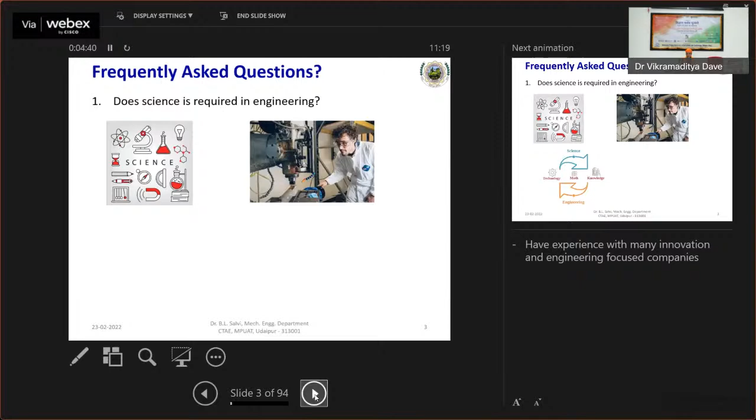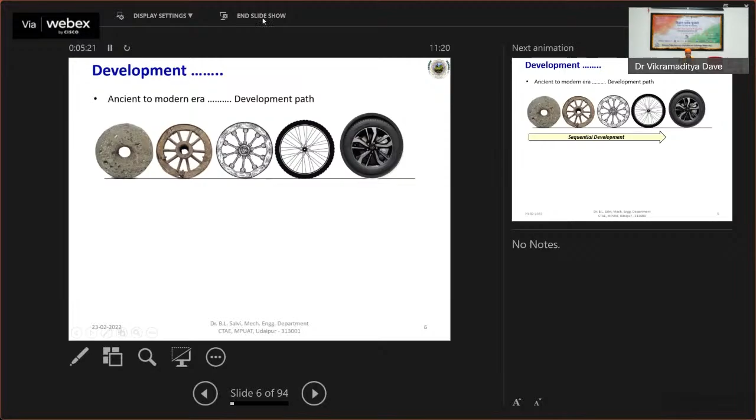Sixth slide. Here we can see the advancements.

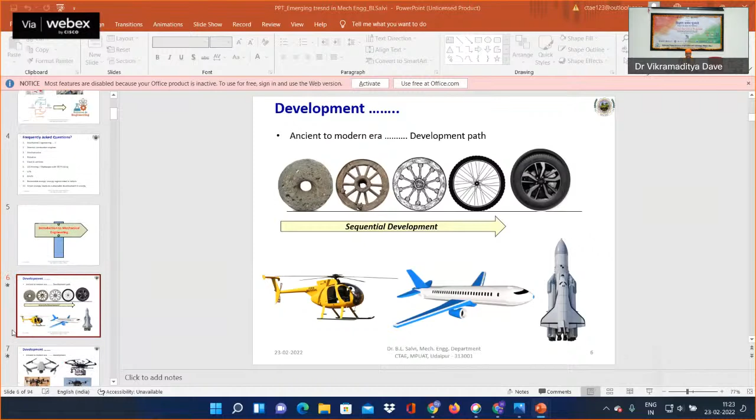When we look at the transportation sector, we can find the role of the locomotive train, where steam power was mainly utilized for transportation, and now we are moving toward the bullet train.

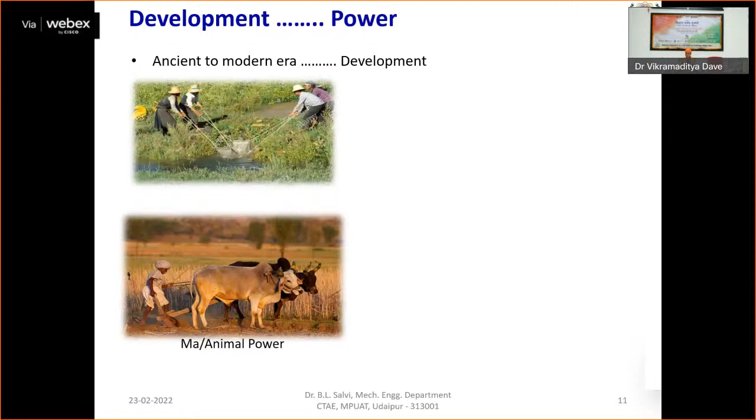Here again we can see the role of science and engineering, where initially manual power or animal power was being utilized for certain agricultural activities, and now we are using machine power, where mechanical engineering is playing a role.

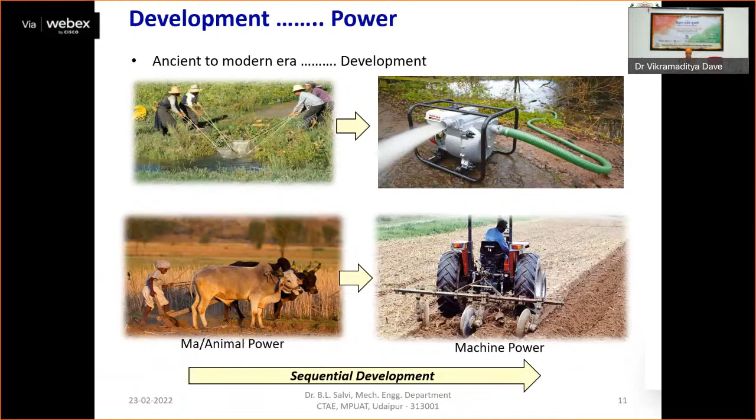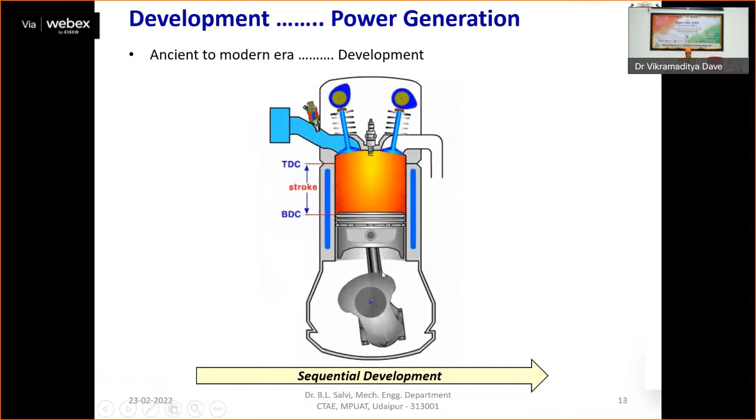Here we can see the steam engines moving toward diesel generator sets for power generation, and now you can see the internal view of the working of the internal combustion engine, where a lot of science and engineering is involved, ultimately leading to the development of mechanical power and then electrical power.

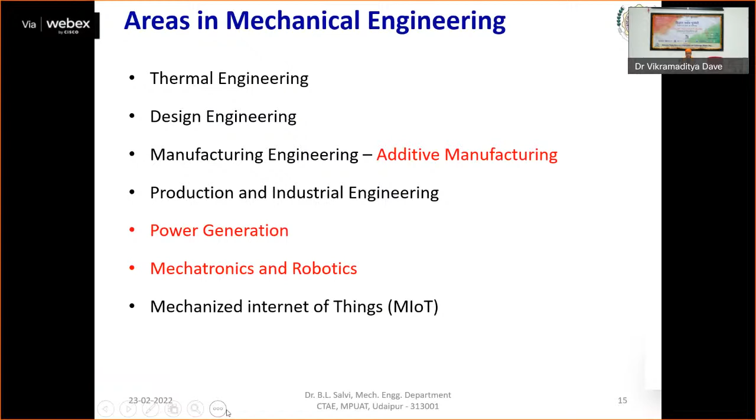So looking at all these things, now let us move toward the advancement part of trends in mechanical engineering, where I will be taking up additive manufacturing and 3D printing.

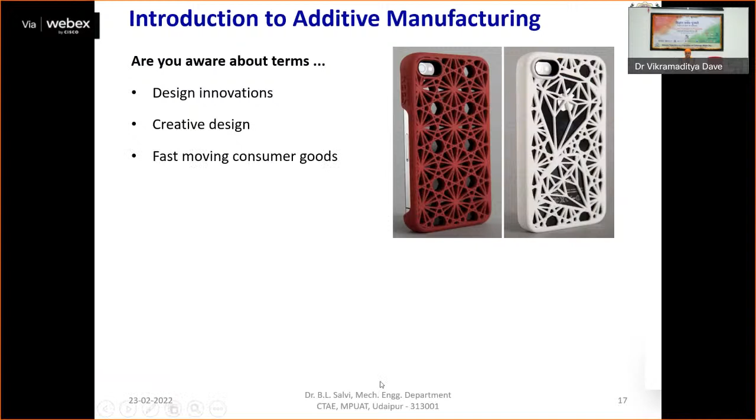So here, let us begin with 3D printing. Let us come to know, are you aware of some terms like design innovation or creative design, fast moving consumer goods, product development? All these things require rapid development of the product.

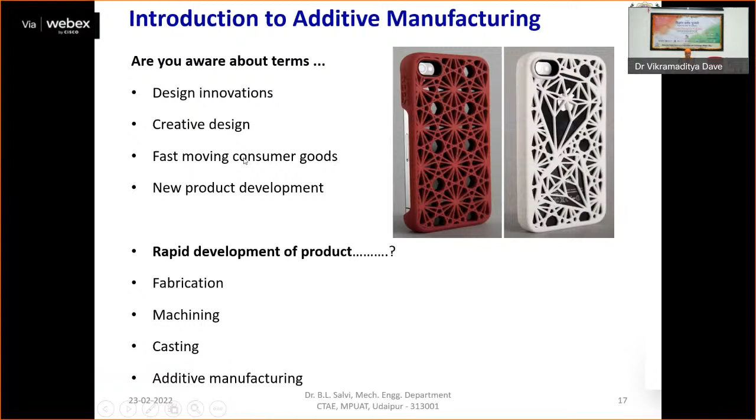This rapid development can be done through fabrication, or through some machining process, or through casting process. In all these things, the advancement now we are having is additive manufacturing, and that can be done with the help of some kind of 3D printers.

So here we use this production technology for material addition or deposition, and we deposit the material layer by layer and get the desired geometry. Materials can be used in the form of wire, or deposition through fusion of powder and solidification.

It bridges the gap from ideas and images on a page or screen, allowing for creation of those ideas and images in a physical object, that is, we say, 3 dimensional. So it allows for fast development.

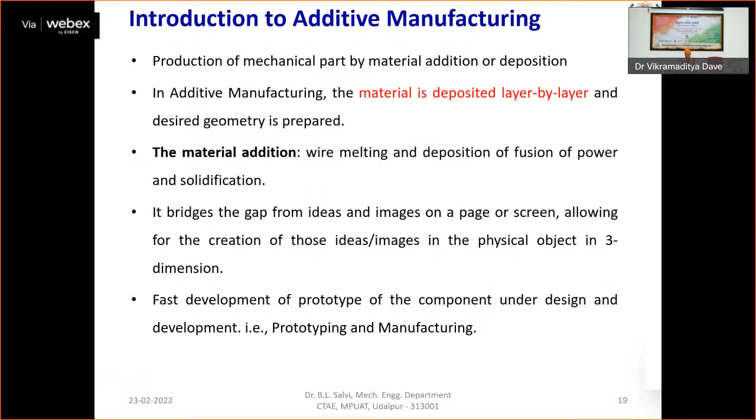So this additive manufacturing is basically used to build up a component by layer by layer deposition of material.

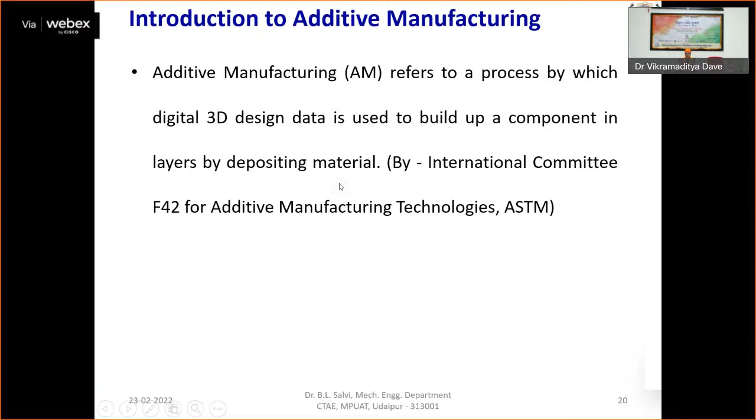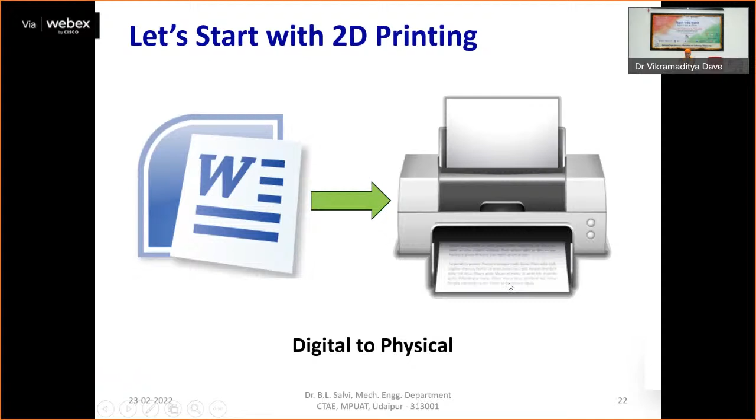So let us come to this 3D printing. The basic concept of 3D printing is to have a 2D printed component, which is like paper we use in 2D printers. But when we talk about the 3D printer, it requires the 3D component in a CAD software.

That 3D model of the component is printed using this 3D printer, and it comes out in the form of an object. So that object prepared can be utilized for education purposes, prototyping, manufacturing purposes, agriculture implements, or medical applications.

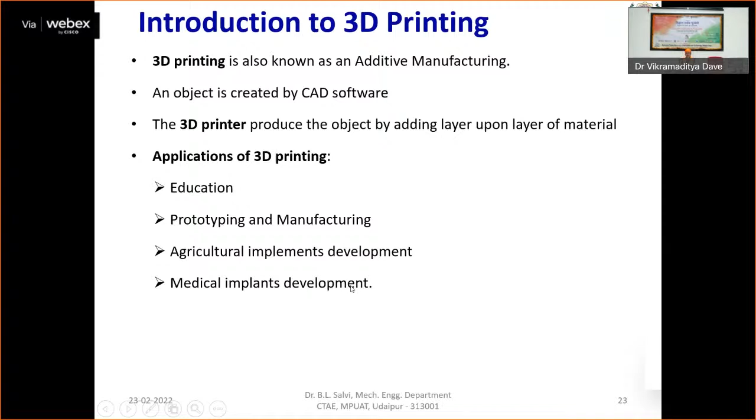You can see here the 3D technology, where the CAD model is developed initially, and this is produced in the form of a real object.

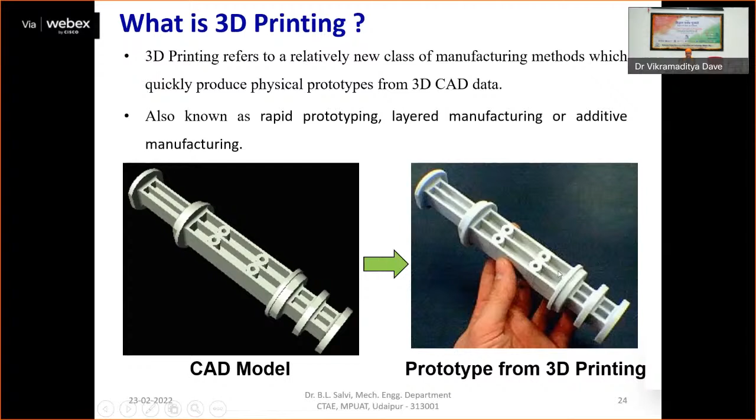How does it work? So basically we have a CAD model of the component which is to be produced. Then this CAD model is sliced into a number of layers.

These layers, when sequentially deposited, give us the component form, and ultimately we can have the physical prototype of the component. So starting from the soft model or CAD model, now we have reached the actual component development, and that is the basis of the 3D printing mechanism.

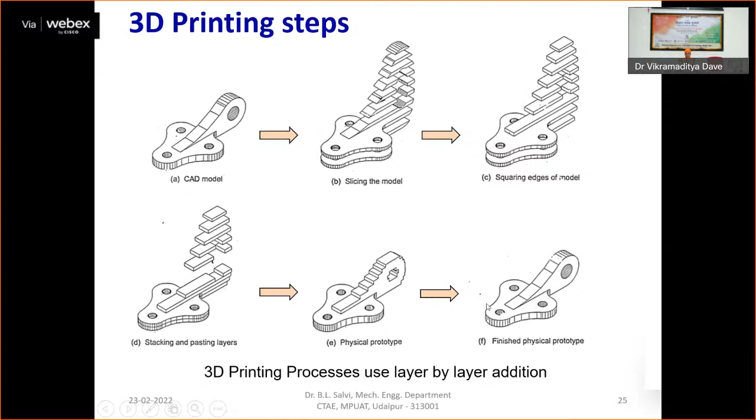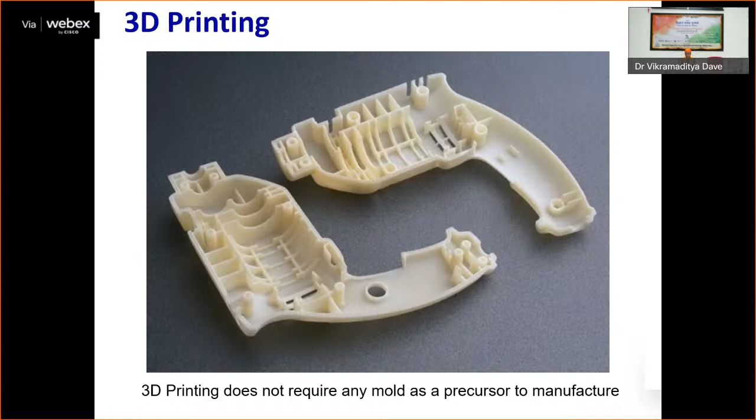So this physical prototype is finished and we are getting the final product. You can develop complex shape components without having any complicated or complex tooling.

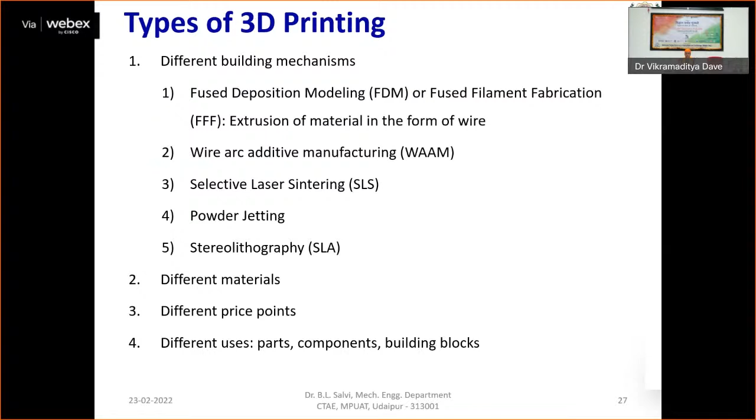There are various methods of 3D printing like fused deposition modeling, wire arc additive manufacturing, selective laser sintering, powder jetting, and stereolithography. Apart from this, there are other methods based on the material used or different price points, or different user needs like parts, components, or building blocks. Based on that we have different technologies.

So how does FDM, fused deposition modeling, work? We use a wire, which is basically a plastic material. It is heated, and after heating it is deposited layer by layer in a proper geometrical shape, controlled by the 3D printer, where mechatronics applications play a vital role. There is a blending of computer science, mechanical engineering, electronics, electricals, and various drives, all together making a machine which brings the component into physical form, and we call it 3D printing.

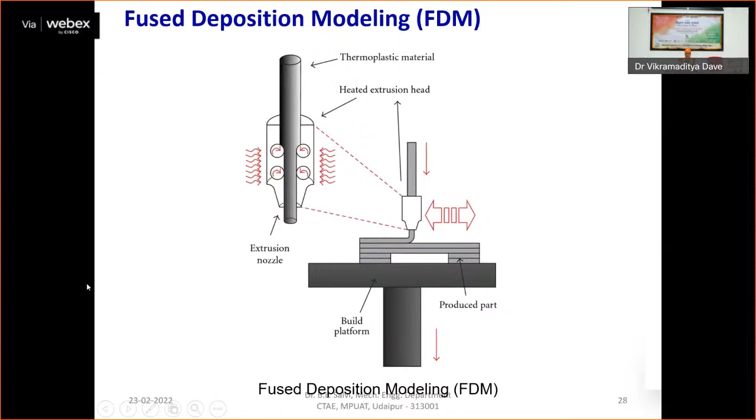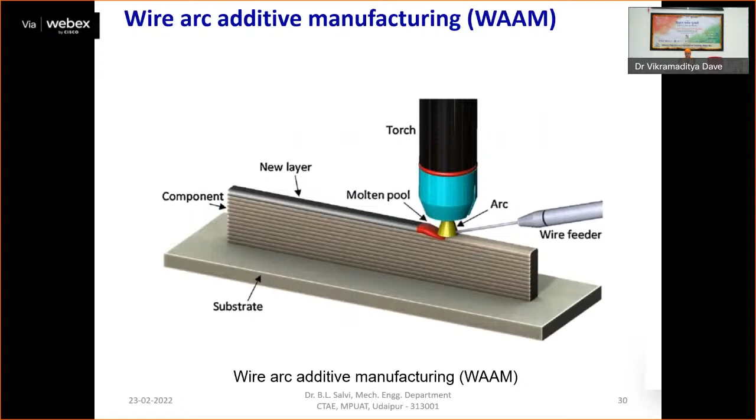Further, we can use a multi-jetting system. We can use two wires for multicolor or multi-material development of the component. There is another kind called wire arc additive manufacturing, where an arc is developed to fuse the wire and it is deposited layer by layer.

To do all these things, we require dedicated materials. These materials can be metallic, like plain carbon steel, tool steel, or stainless steel. You can use polymers like ABS, nylon, or PP material, epoxies, and many more. Other materials also exist, like refractories such as sand or ceramic waste, elastomers, conductors, and then we have good applications of biocompatible materials.

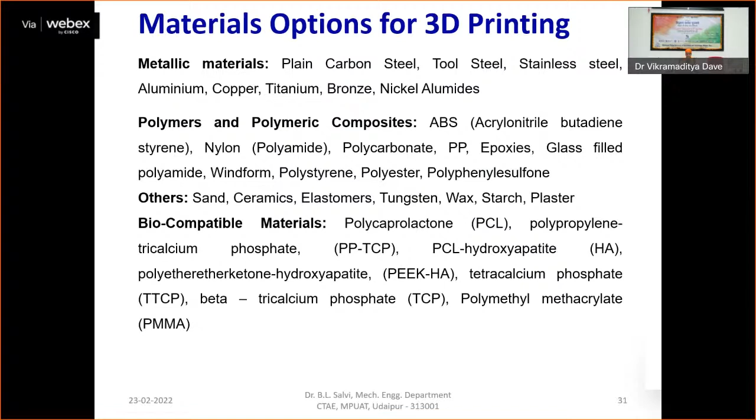We can replace some damaged hip joints or body parts through proper development of components with the help of 3D printing.

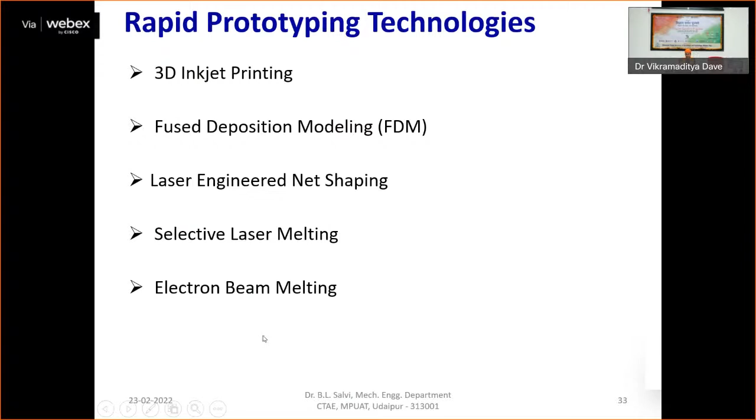This 3D printing is basically a technology which helps in rapid prototyping, and here we use concepts like 3D inkjet printing, fused deposition modeling, laser engineered net shaping, selective laser melting, or electron beam melting. These technologies help us, and how do we do it?

Let us look at one layout of rapid prototype technology.

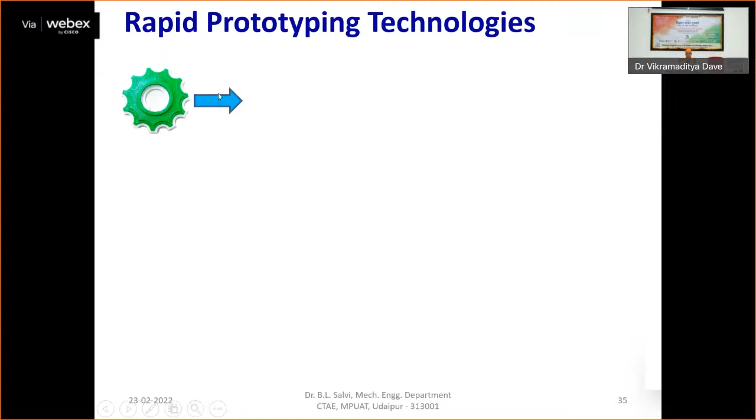After developing the CAD model, this CAD model is saved as an STL file, which is transferred to the 3D printer software.

This 3D printer software, which may be Cura, Blender, Autodesk Fusion 360, or Creo, will process the entire STL file, and after various settings, we can convert this file into G-code.

With the help of memory or an SD card, the G-code is fed to the 3D printer where we get the output component as a real object. So whatever soft object was there, that object has now been transferred into physical geometry. That is the way we are able to develop things using rapid prototyping.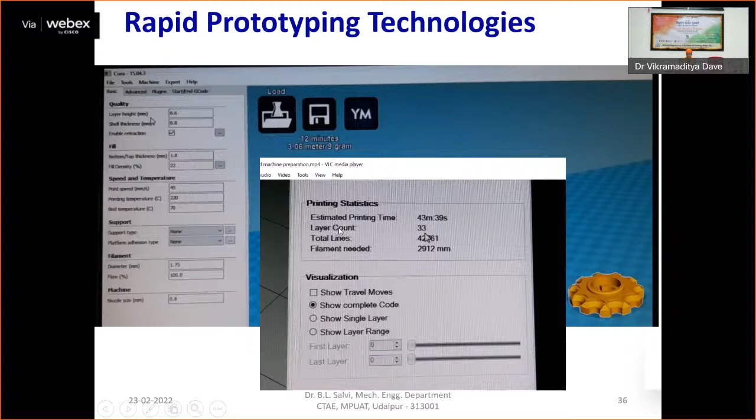Using this technology, we are able to make many components, and the software shown here is rapid prototyping software. A 3D printer is required, with which we can develop the physical model of the developed CAD model.

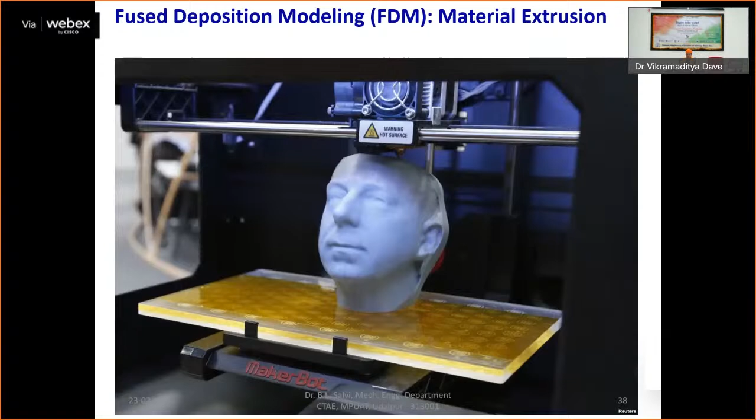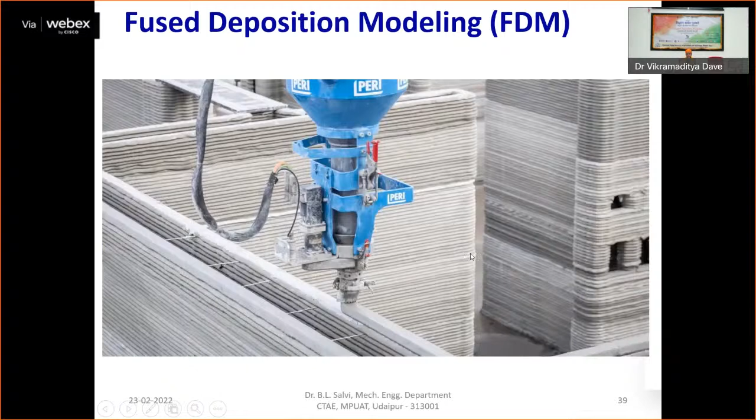You can see the various applications of 3D printing in developing building blocks as well, where complex shapes can be developed with the help of 3D printers.

This is one more example, a more professional way of developing a prototype, where we can see it having different materials, and this was produced as a one-shot component using the 3D method.

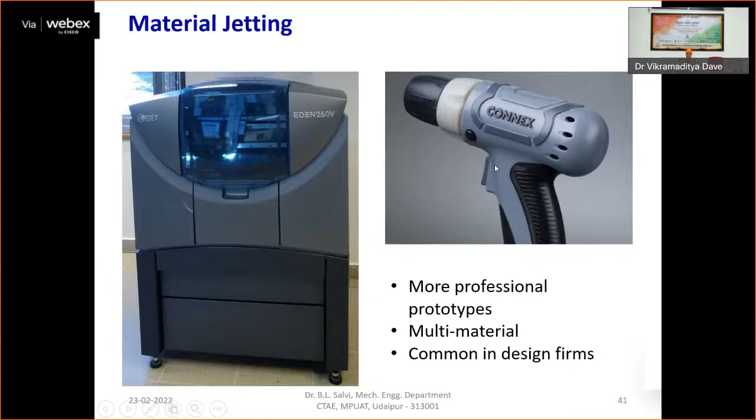We can use 3D printing in developing dies or various board patterns for jewelry design, and these various complex designs can be developed.

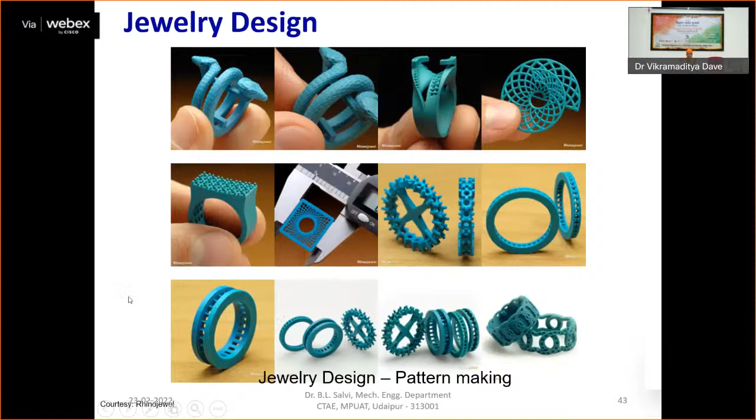Reverse engineering is also possible with the help of 3D printing, where a soft model is developed with the help of a physical model available by scanning the component. Then this soft model is processed, and finally we can get the other physical component from this. So reverse engineering is also possible with the help of 3D printing.

These are various medical appliances where 3D printing plays a major role. So now we can see how science and engineering together are helping society.

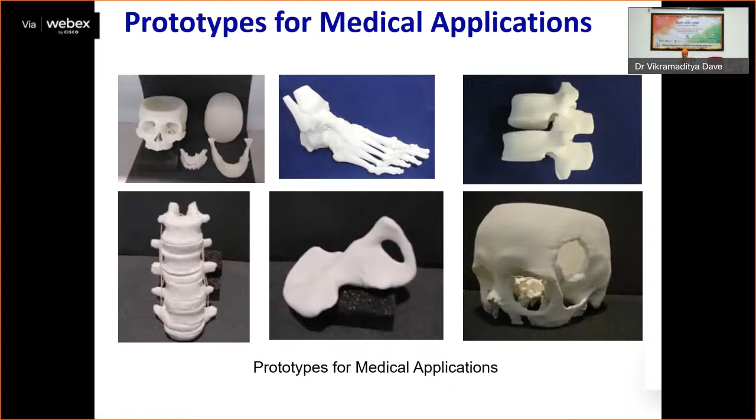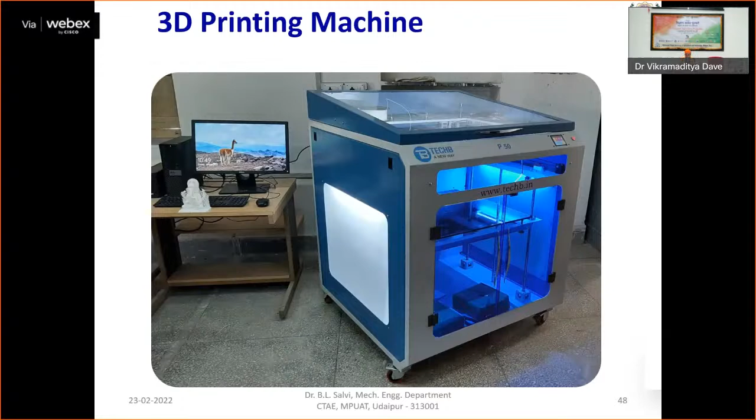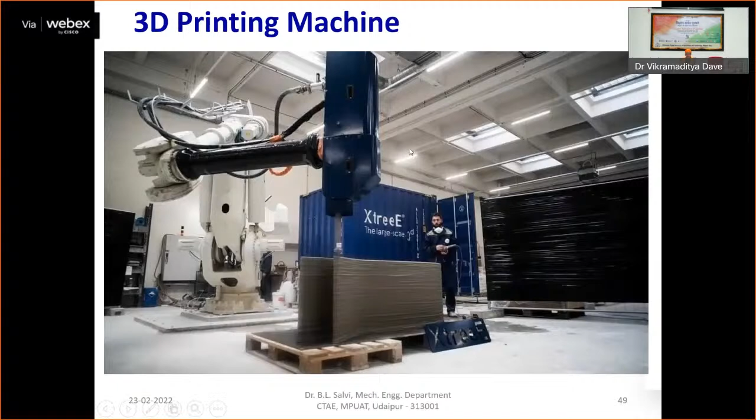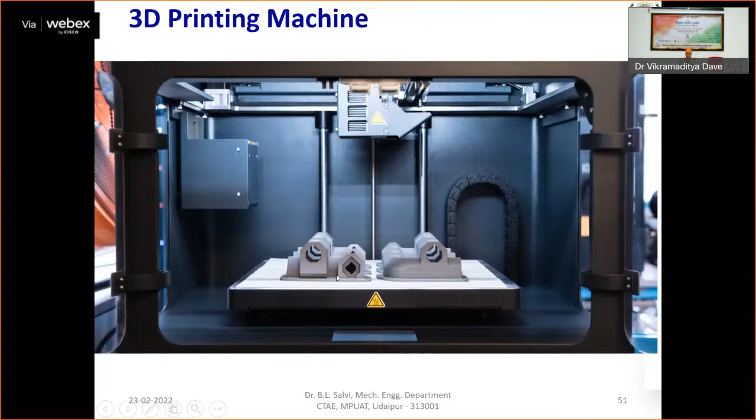So now we can see the 3D printing machines. These machines are of different geometry and different shapes depending on the utility aspect and the need of the customer. This is the way how we can make the model of the 3-cylinder IC engine's cylinder block. There are some other components being produced with it. So we at the Department of Mechanical Engineering are having 3D printing machines where we can develop different models and get the prototypes.

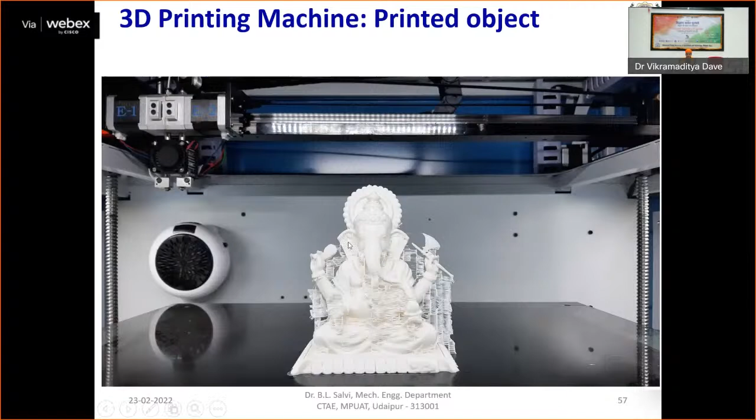This is one physical object developed with the help of this 3D printing machine. Without any complex tooling, in a one shot, this was produced. Different materials can be used in a single component. This can be produced.

So, looking at various advantages and making the product development in a rapid manner, there are still certain challenges and scopes available in 3D printing, where the challenges are limited and high cost of material, unreliability of machines, and there are some 20% rejects which can be reduced and productivity can be enhanced.

Challenge: scaling of technology. The 3D printing allows the development of product at small level, but when it is to be scaled up, then there are challenges.

Speed or time to manufacture: yes, of course, it requires less tooling, but to develop the 3D product, it requires a longer duration. As in our earlier example, it took 9 hours for the component development.

Surface finish is one issue, then resolution of the object, and mechanical properties. The components prepared with the help of this 3D printing have quite inferior mechanical properties. Post-processing is required, and still it is being used for initial prototype development, making the shapes only.

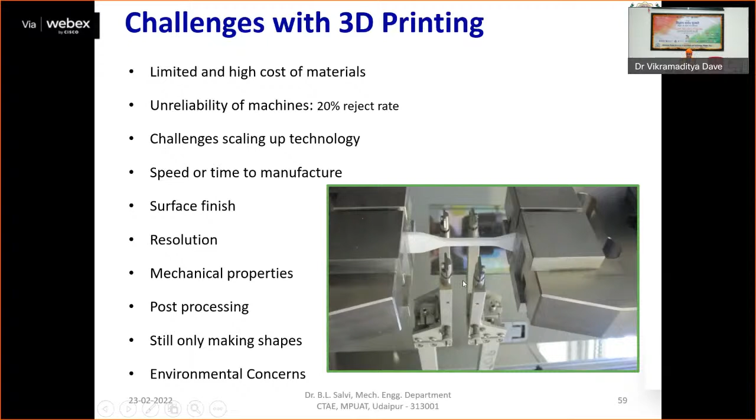Some environmental concern aspects are also there with this.

So, this is one aspect of the blending of science and engineering from a production point of view. Now we are moving toward another aspect of the science and engineering: mechanized Internet of Things in agriculture. Internet of Things is basically more helpful, more useful in smart farming, where a system is built for monitoring the crop, built with the help of sensors like the light sensor or humidity sensor, temperature, soil moisture sensor, etc.

And then automatically the irrigation system can start. So that is the concept of IoT we are using in agriculture. But you see, Internet of Things is a kind of protocol and some communication technologies. But when you talk about the irrigation, how the pump will be started, how much power is being developed, how the sensor is giving signal to the pump...

In all these things, we require the physical entity, and physical entities are developed through the production, where mechanical engineering plays a vital role.

The farmers can monitor the field conditions from anywhere with the help of this IoT. IoT-based smart farming is highly efficient when compared with the conventional approach, because in the conventional approach manual monitoring is required, while this IoT can give time-to-time information and help in decision making.

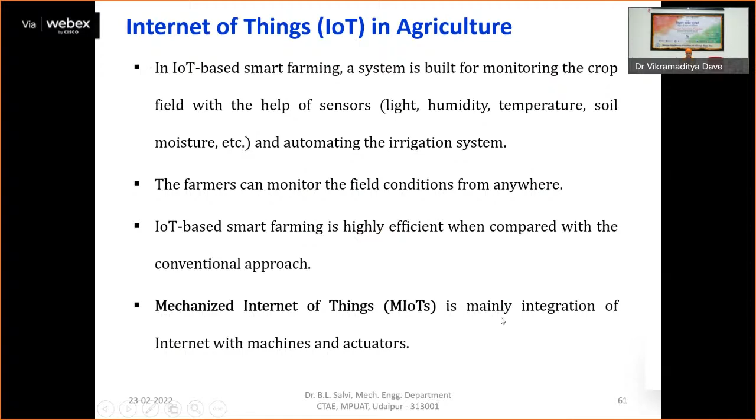So, making use of this IoT and other things together, we are having the blend of mechanical engineering and Internet of Things. That is what we are calling the mechanized Internet of Things, which is basically the integration of internet with machines and actuators.

This MIoT has a lot of applications in precision farming, agricultural drones, livestock monitoring, smart greenhouses, and many more areas where MIoT can be used.

Here we can see the integration aspect of IoT with the field and sensors. The field has machines and sensors, and these are getting information through the sensing technology, and this sensing technology gives information to the smart analysis system where planning is done.

And through this planning, when a decision is required, a smart control plays a role. So there is a closed loop in getting the information, processing it, and disseminating this processed information in decision form to control the things. So there is a close relation between the internet and the physical machines.

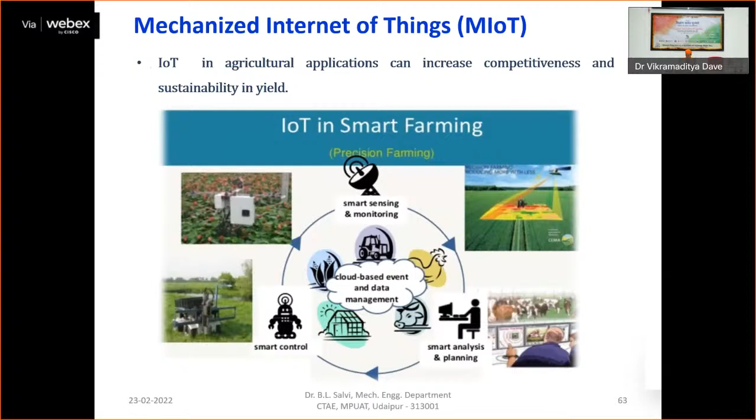You can see here agriculture drones, seeding robots, weeding robots, autonomous tractors, electrical robots for autonomous spraying, and harvesting robots. So having different needs and different applications, the systems can be developed. So here is a very beautiful combination of science, engineering, and technology, a blend which will be having future agricultural scopes.

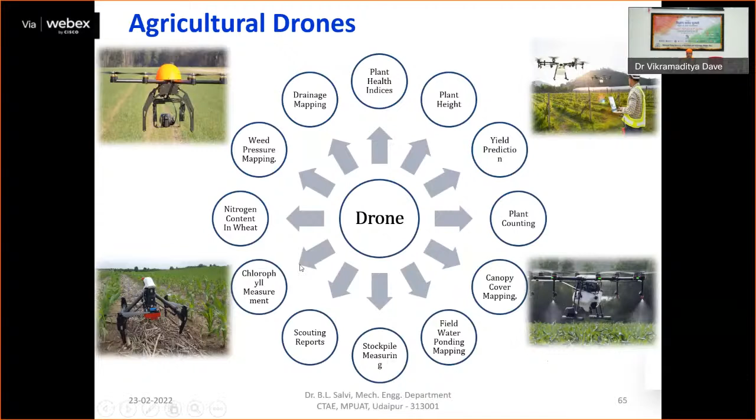So these drones are very useful nowadays, and these are helping us in many ways, like plant health indices, plant height, yield prediction, plant counting, canopy cover mapping, field water ponding mapping, stockpile measuring, scouting reports, chlorophyll measurements, nitrogen content measurement, and many more applications where this technology is supporting humans for better agricultural activities.

In drone technology, the sensor is getting the information, and through the IoT we are passing this information to the processing unit, where electronics plays a role. This information is then transmitted back to the drone, which has sensors again sensing the information. The feedback loop is going on, and in this way we are controlling the things.

So alone mechanical engineering cannot work, alone Internet of Things cannot work, alone sensors cannot work, or alone electronics cannot work. So there is a need of a multidisciplinary approach for bringing out the better use of science and technology for human comfort, for the betterment of productivity.

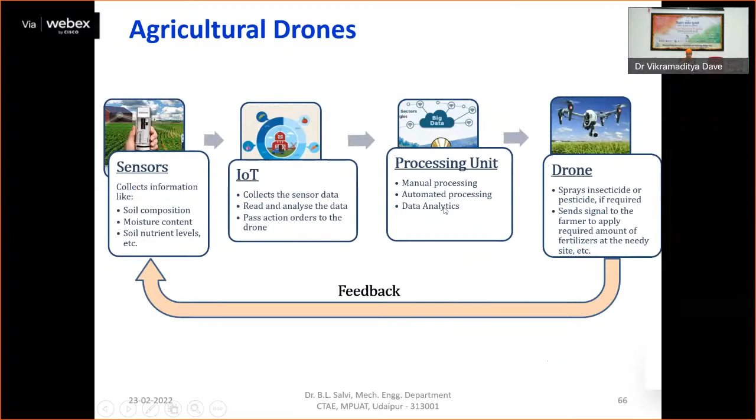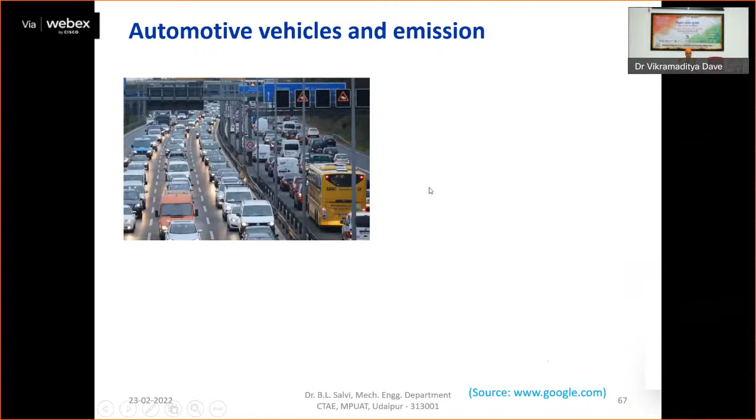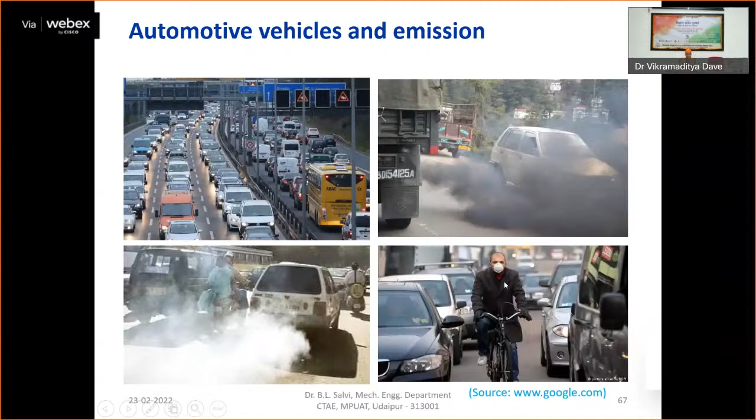Now looking at all these things, sensors require power, internet requires power, the processing unit requires power, drones require power, electricity is required. Earlier we saw transportation vehicles and 3D printing mechanisms - everywhere power is required. In transportation also, we have a huge fleet of vehicles leading to emissions, and one can see how these emissions disturb our ecosystem. Sometimes even a person riding a cycle needs to have an air filter.

So looking at these things, now we need to shift from the conventional energy system to the advanced energy system, or say hydrogen economy system. In the very beginning we were using fuel wood, then we shifted to coal, and as that component decreases and other energy sources increase, we moved to oil utilization, and finally we are moving toward hydrogen application, where the future is hydrogen. So we are moving toward the hydrogen economy, where we can have sustainable options.

Our society should survive for a longer period. We should leave something for the society or for our coming generation. For that, we should switch over to renewable energy generation, where fuel cell power generation or green hydrogen production are emerging trends which are under research, and some areas are having good outcomes as well.

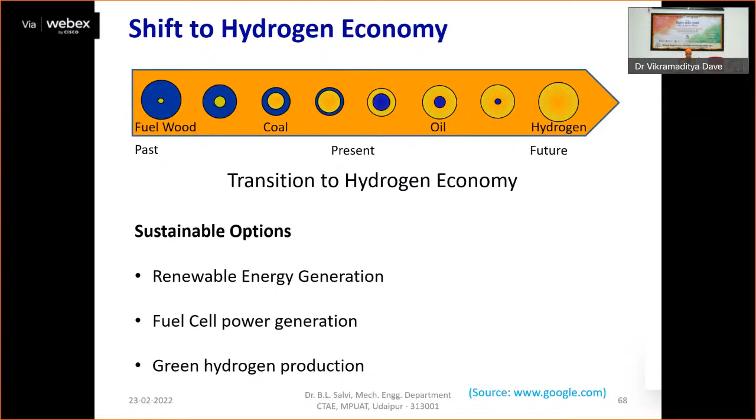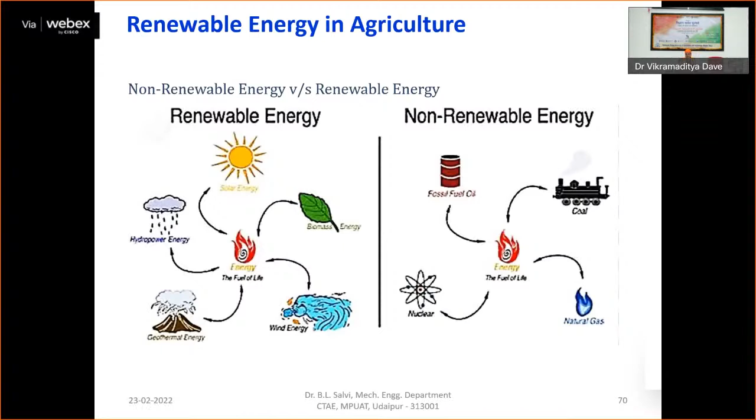So renewable energy is the energy which is regenerated from nature itself. You can see the non-renewable versus renewable kind of thing. Non-renewable is where you use fuel, fossil fuel, or nuclear, which by converting into thermal energy generates power. But in case of renewable energy, we are dependent on nature - we receive energy from nature, utilize it, and one form of energy is converted to another, and it is recycled again. So the overall disturbance in the environment is nil. Here we have different options like solar energy, wind energy, biomass energy, hydropower, wave tidal energy, geothermal.

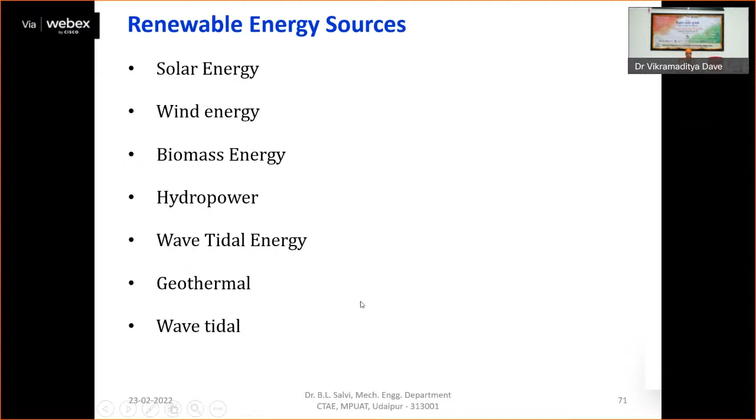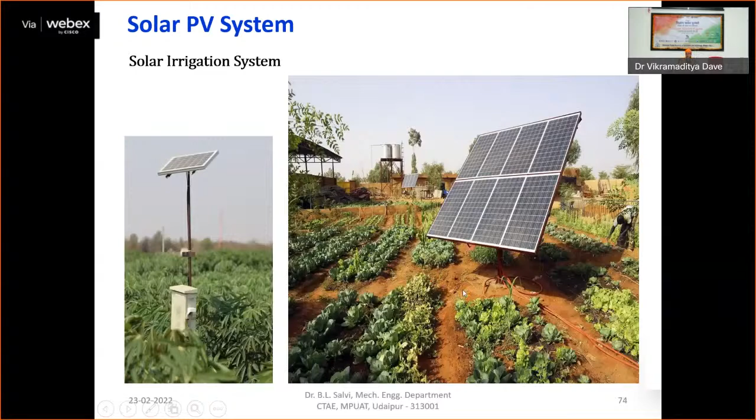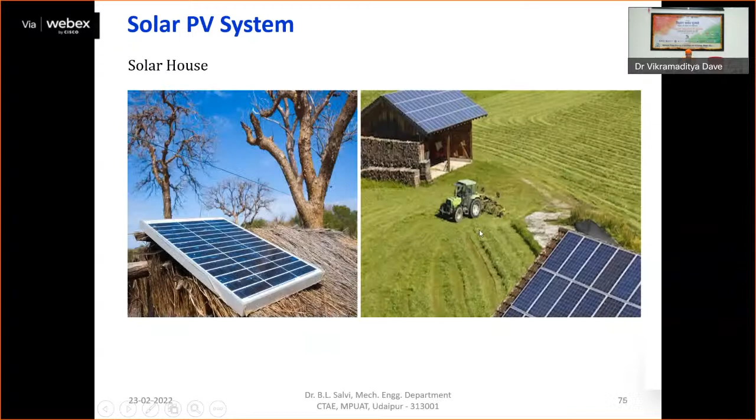Let us first come to solar power generation, how this is being planned and how it is coming into the picture for renewable energy harvesting, where farm applications are there, with solar power harvesting systems being installed on farms. You can use solar power for sensor powering, for farm powering, irrigation purposes, or different combinations. Solar energy harvesting is a good option.

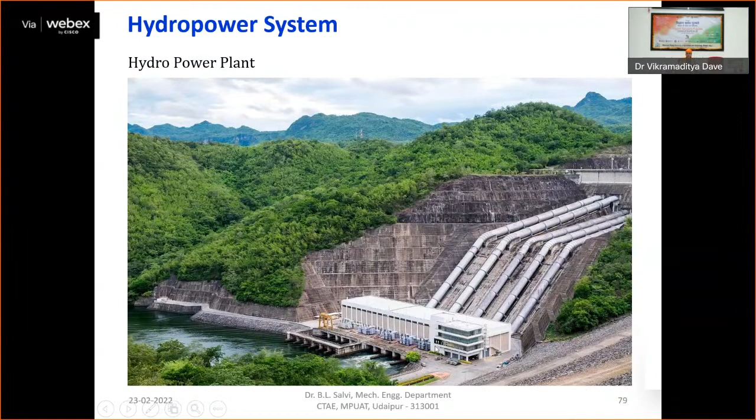Then we have hydropower. Mainly the hydraulic energy or hydro energy is converted into mechanical energy, and then finally electrical energy, where the hydropower system is nowadays being installed at many places where the potential is available. One can see the big view of this hydropower plant installed at the upper side - the storage water is available and it is being passed to the hydraulic turbines where electricity is generated.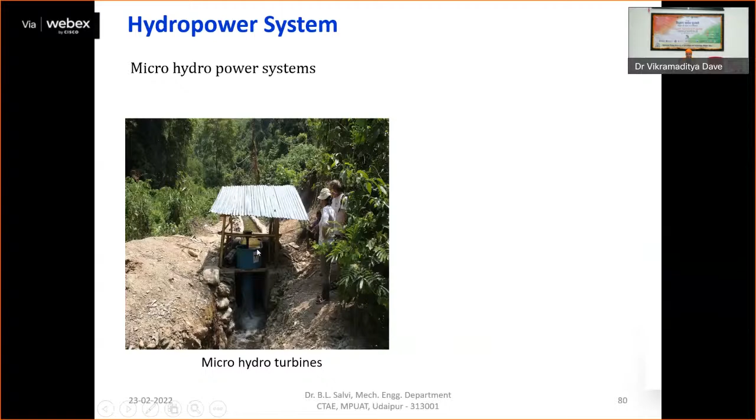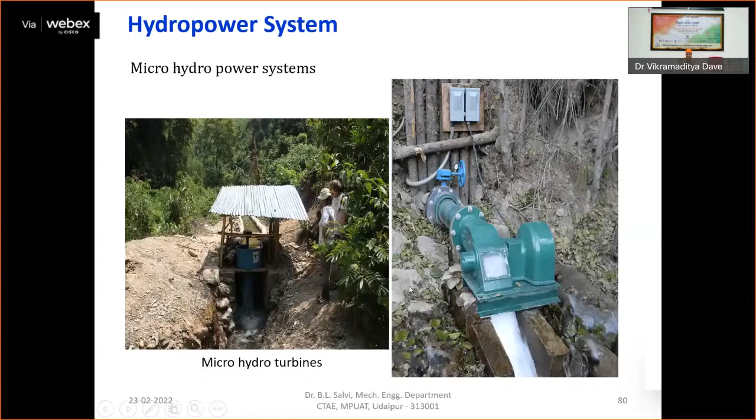Apart from this, we have many small options - micro hydropower systems, where one can see local power generation. It's a kind of different innovation done by local people catering to their need. One can see the small hydropower system generating electricity, and it's being utilized in a decentralized manner at the local level.

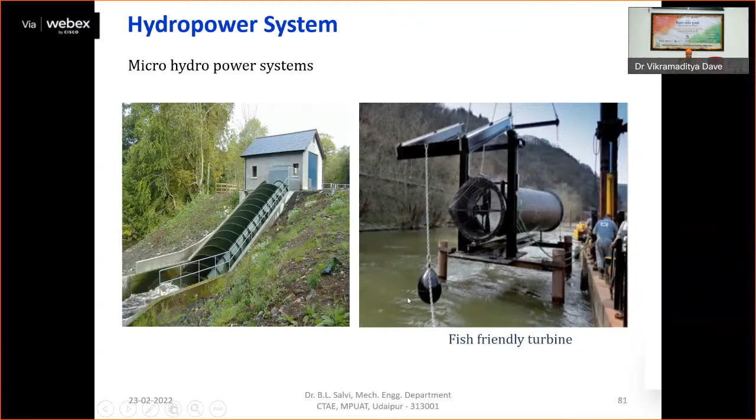You can have another fish-friendly turbine like this, where a net is available, and this is dipped in the water, and this turbine will be moving and generating electricity through the flow of water available from the river stream. This is another way we can harness hydropower. There are control systems where floating tank kind of things are available, and this common shaft is used to develop the power. Then we move to the bioenergy system.

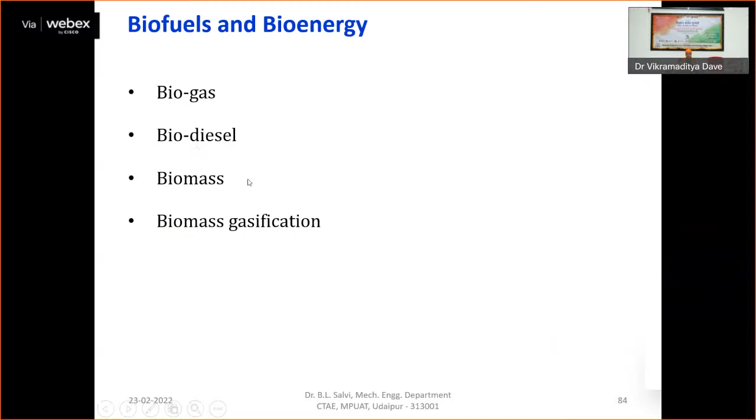Bioenergy has different segments like biogas or biodiesel, biomass where direct burning is done, and biomass gasification. Looking at this bioenergy system, there are various supply routes and options available to move toward sustainable energy development. We have primary bioenergy where biomass can be collected from agricultural waste, forest waste, or energy crops, and these biofuels are processed and utilized for power generation in the power sector or agriculture, in the form of biodiesel, bio-CNG, or compressed biogas.

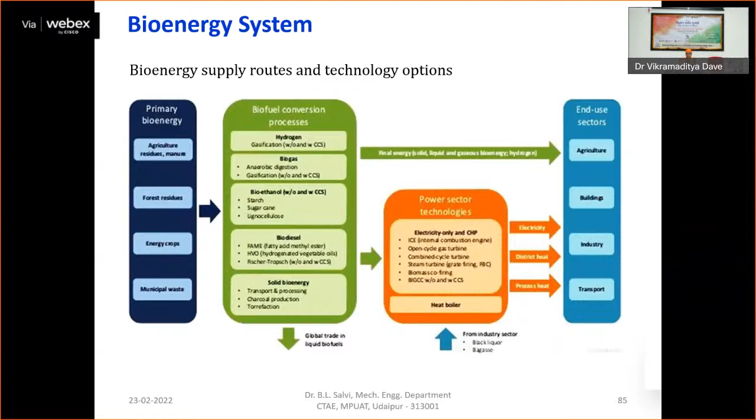There is a biomass life cycle and sustainability connected with this. It's time to bring into the closed circuit nature - the plants, sunlight, and animals which are part of this ecosystem. These consume the green biomass and give cow dung, which is utilized for generating biogas, or if used in solid briquette form, biomass gasification is done. That processed fuel is utilized for transportation or electricity generation, and this biofuel upon combustion converts into H2O and CO2 and ultimately goes to the environment. This completes the biomass life cycle and leads us toward sustainable power generation.

In every activity there is a close relation between science and technology - science is converting biomass, providing the technology for biomass into biofuel. Engineering supports by bringing all these technologies and science principles together to develop a tangible product.

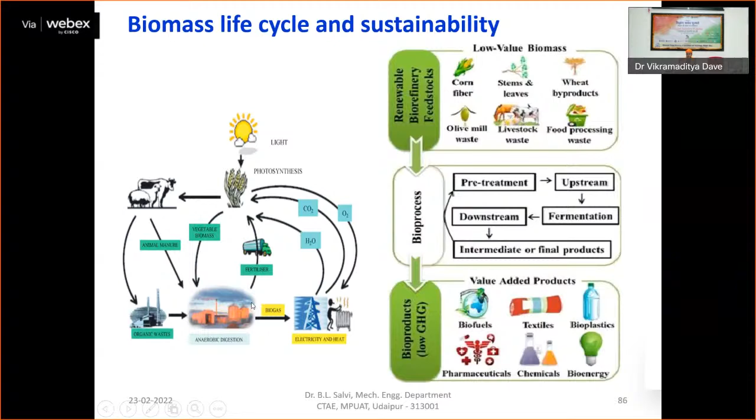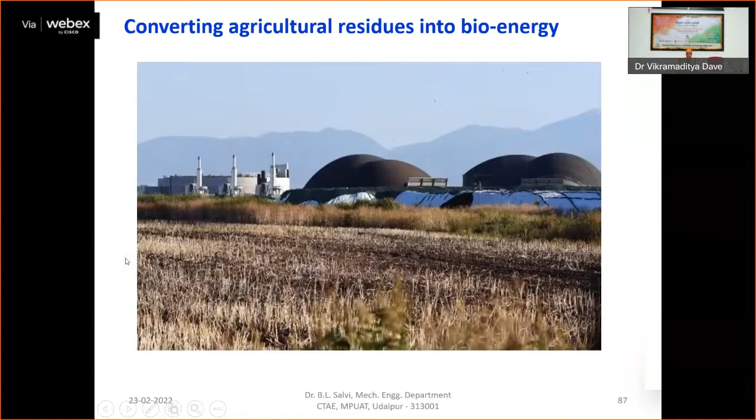One can see here converting agricultural residues into bioenergy, where large size biogas balloons are available, and from this biogas is enriched and compressed to develop bio-CNG. Biomass gasification plants are available, which can be utilized as a power generation system and fuel development system based on biomass.

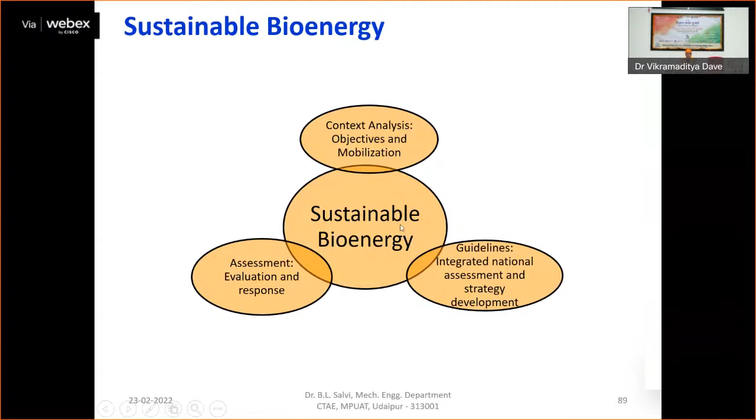There is a need for sustainable development, catered by incorporating natural resources, bringing them together, integrating them, and harnessing energy from those systems. We require context analysis where objectives and mobilization should be crystal clear. Guidelines are required from the government side for integrated national assessment and strategy development, and there is a need for proper assessment, evaluation and response. All these three parameters together will lead to sustainable bioenergy system development.

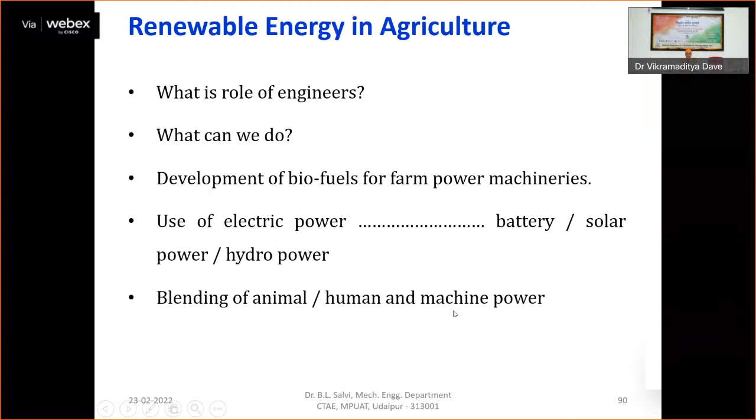In renewable energy and agriculture, as engineers, what is our role, what can we do? Development of biofuel for farm power machines can be done, or we can go for electric power utilization like battery, solar power or hydropower. Blending of animal and human machine power can be done. Altogether we can use the primary production feedstock for power generation.

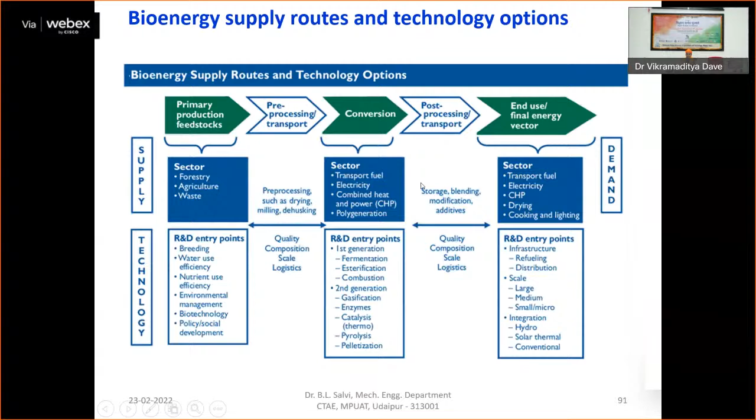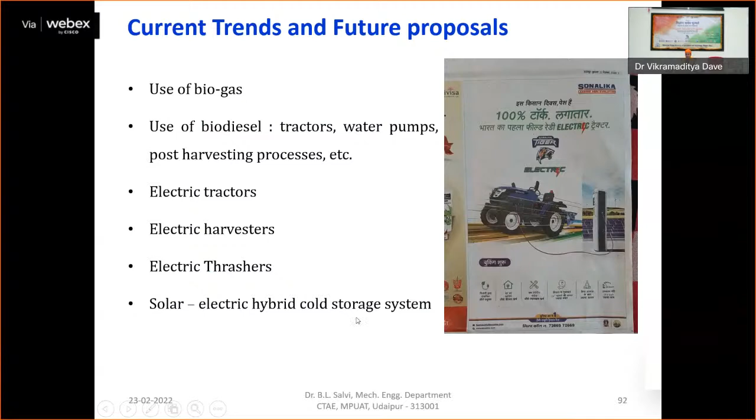We are moving toward the use of biogas and biodiesel for tractors or water pumps. Electric tractors are now coming into the market, along with electric harvesters, electric threshers, and solar-based electric hybrid systems. There is already an available tractor in the market that is completely electric based.

In the agricultural context, being at the agriculture university, Maharana Pratap University of Agriculture and Technology, we are looking to the future toward incorporating various science and technology into farmers' fields, integrating them and bringing all these things onto a common platform for the improvement of production and productivity. With this, I close my session. Thank you very much for inviting me.